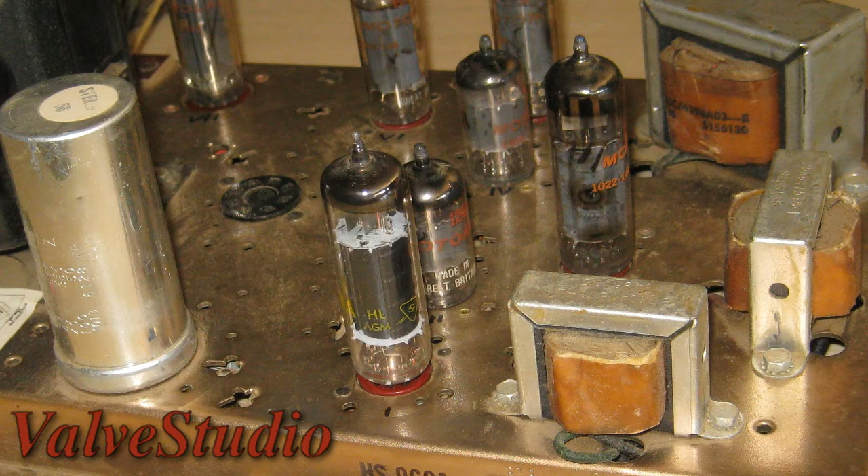It's Sunday here. I started out the morning by watching a video from the Indian Institute of Science on inductors. It's a very good video. It's an hour-long college-level lecture on inductors, and they go through a lot of the theory, and then they go into some specific examples. Now that's part of their series for switch power supplies, and so a lot of it's applicable to what we're doing here, because I want to get down to understanding that part of it, because at some point I want to wind my own transformers.

And by talking to Patrick Turner in Australia, he said, you know, get to doing something, and then he recommended I start with a choke. So a power supply choke is typically in the 5 to 15 Henry range at between 75 and maybe 300 milliamps. So that's my goal, is to go ahead and take the coil winder, that project I was working on, finish that up, and wind a choke, and get some of my test equipment fleshed out to do inductive measurements.

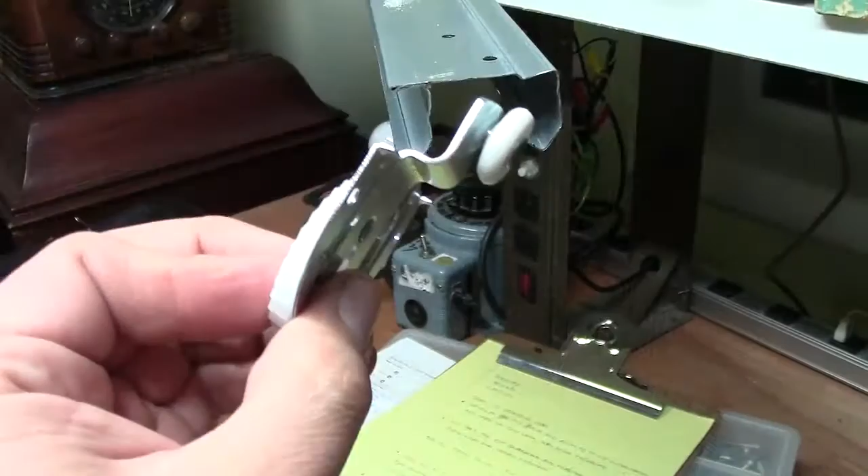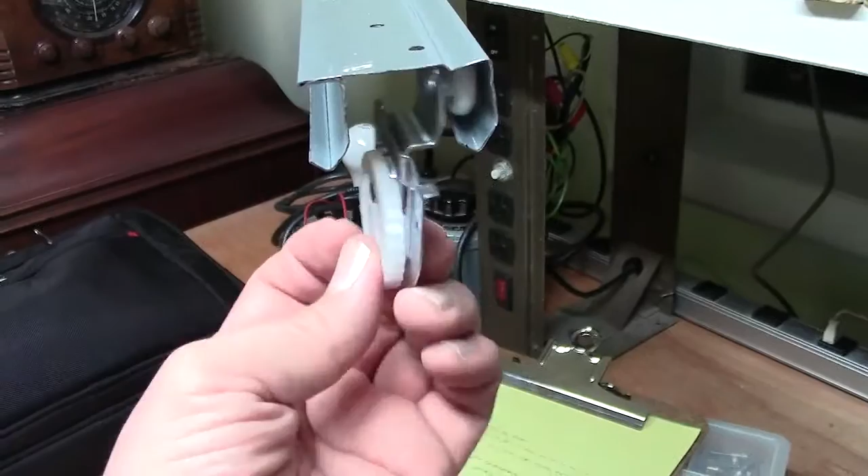I found this kit for sliding doors at Home Depot, and it's a rack up here with 2 hooks on it, and then you get these fixtures that you hook onto a door, and they slide in here back and forth. So what I need is something to hold these two apart while I kind of dangle a piece of extrusion down between them and kind of make a carriage to go back and forth on this rack. This rack was relatively inexpensive. It's 4 feet long. I think I got it for maybe $20 or something like that.

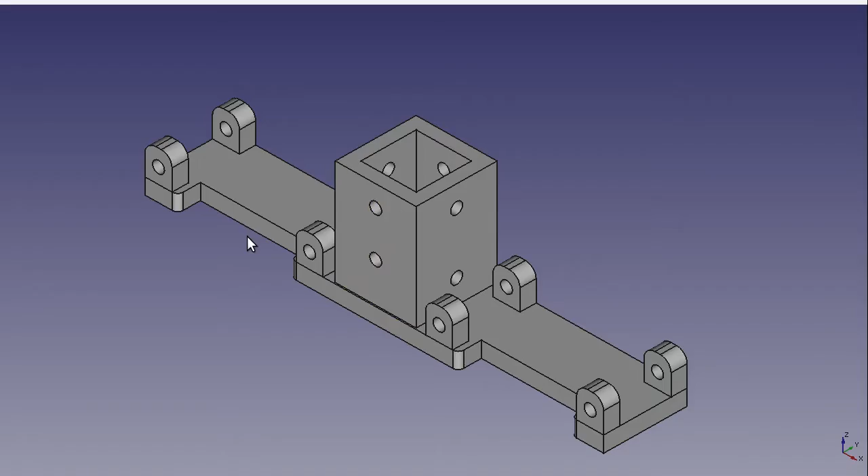I drew that up in FreeCAD. I'll go ahead and show you that model here. So it's got a little plane. It's got a back plane, and it's got a little cup to hold the extrusion in. And I'm going to put the screws, these M4 screws, through these holes and screw everything together. So this is going to dangle from the ceiling, basically.

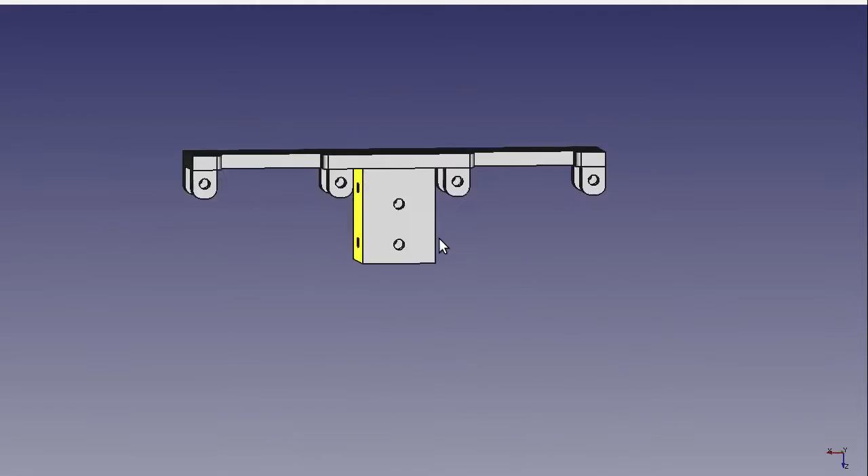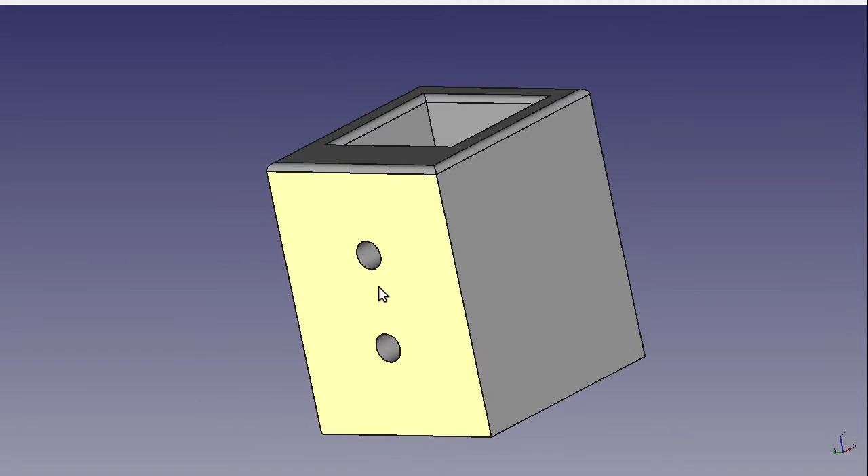And then here's the next part I worked on. This is a slider that goes along the extrusion that holds the camera. And I have a ball joint camera mount that I got at Amazon, and I'm going to attach it to this sliding part that I made, so I can adjust the height, and then I can use the ball mount on the camera mount to adjust the angle.

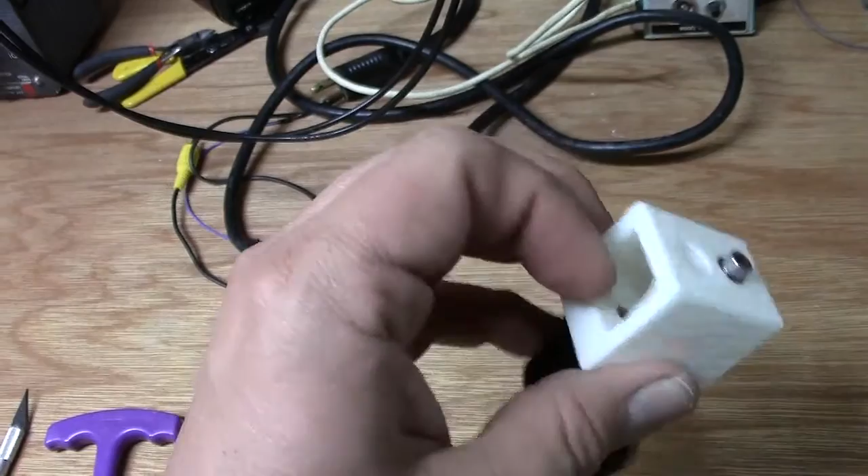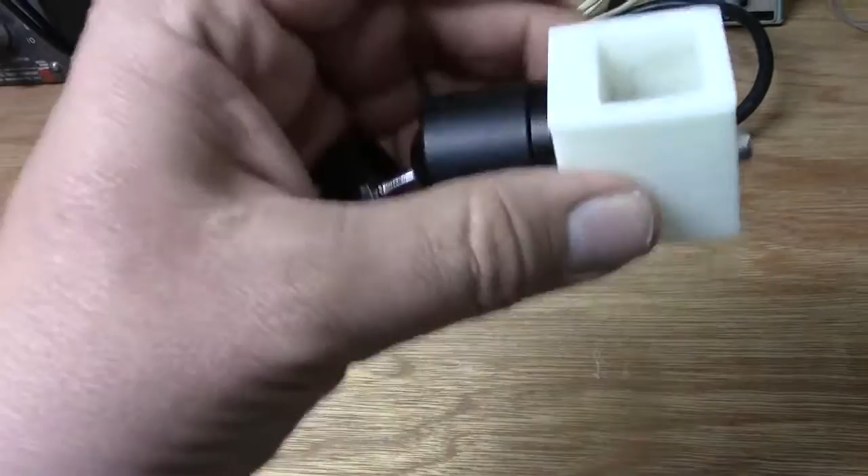The screws come through here and actually embed it into that side, and then I put the Allen wrench through this hole as well. And then this screw here is what actually clamps to the end of this, slides over the extrusion, and this little piece fits inside the slot on the extrusion, and I can just finger tighten this on, and it holds it in its vertical position. That's the camera mount. Over here, this is the first version of the part that I drew up today. I didn't look at these parts very closely before I got started.

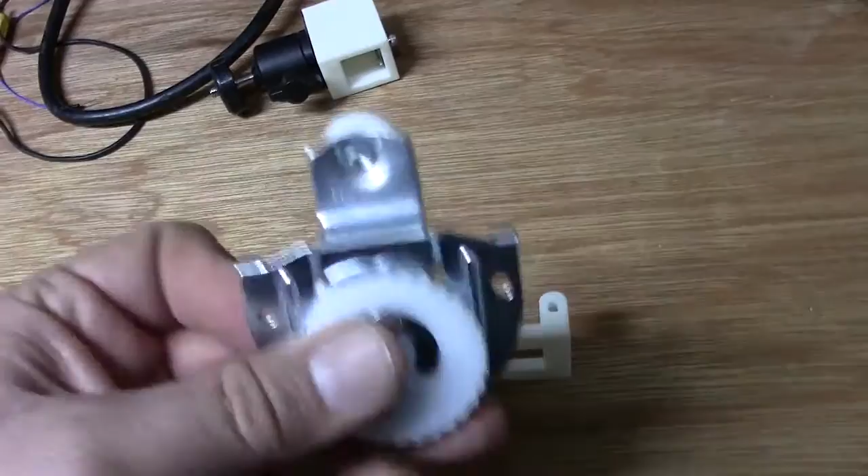I was just really excited about 3D printing something. So I figured, all right, we'll put one on like that, and as you flip it over, put the other one on like that, and we'll be good to go. But if you look at these, they're not designed to go with the wheels on the inside. So I quickly figured out, well, this isn't going to work. This took maybe an hour and a half to print. So that's now going into the recycling bin. My second version is here, and I got three of the parts on it.

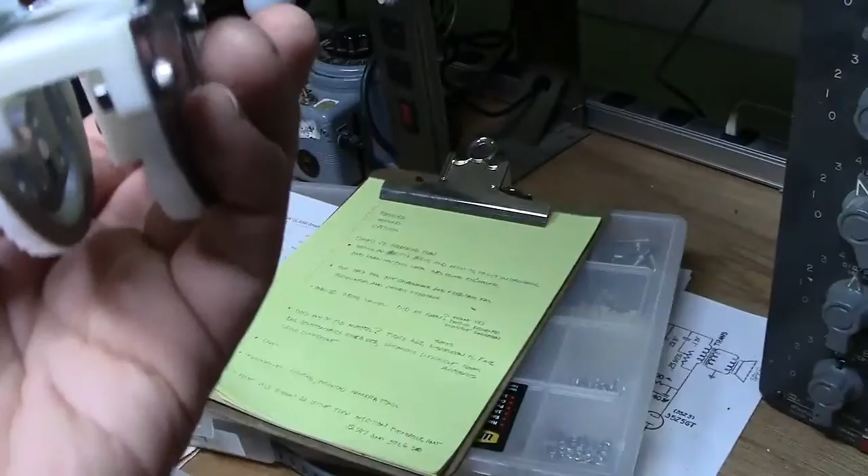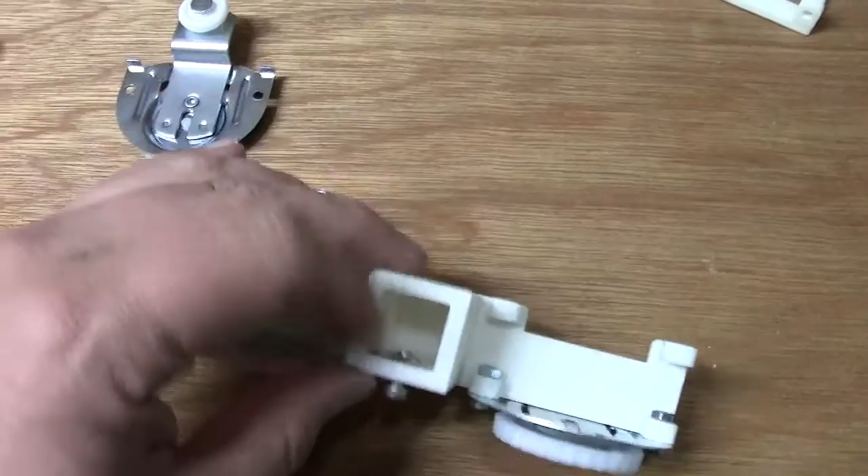And you can see that I got the spacing a little bit further apart, so I can come over here and show you this thing here. So I put that fourth wheel on there. It's really actually very stable, and it's very smooth. And my extrusion fits in this hole, and this thing dangles from the ceiling. It's going to go back and forth.

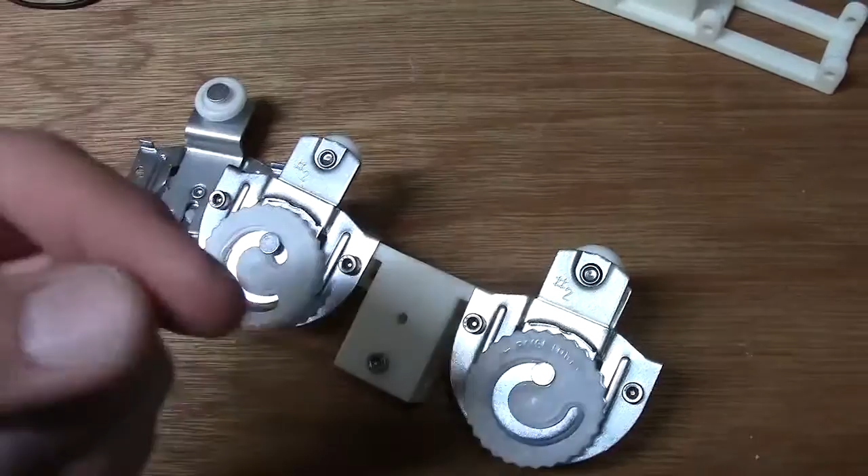And if I have problems with the tilt of the plumb of the rod, I can use these leveling wheels to kind of rotate the part back and forth up in the channel. That looks all pretty good. We'll put it together, and we'll see how it works.

While those two parts were printing out today, I had a lot more time, and I spent that time reading over more about chokes as well as inductors. I kind of know how you set the air gap or determine what it is, but I don't know physically how it's set. What is it made of? How are the laminations actually separated, and how are they clamped back together? So I kind of poked around. I haven't found anything on that yet.

I did go over and I started reading Patrick's website on chokes specifically. He has 3 pages of choke examples there, as well as how to test your choke once you get it done and set the air gap. So I ran into that a little bit tonight around 8 o'clock. I'll pick that up when I get back. I'm going to mount this rack up on the ceiling as well. So the next time you see me, we will be having an overhead camera.